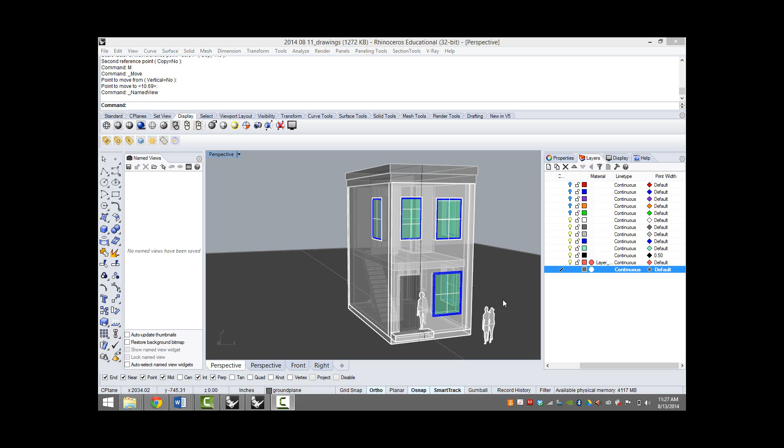Let's make a new layer and call it ground plane. We'll type in plane, or go to this menu. I prefer surface from 2 points, so we'll drag out a surface underneath our building, like so. And if it's too small, you can scale it.

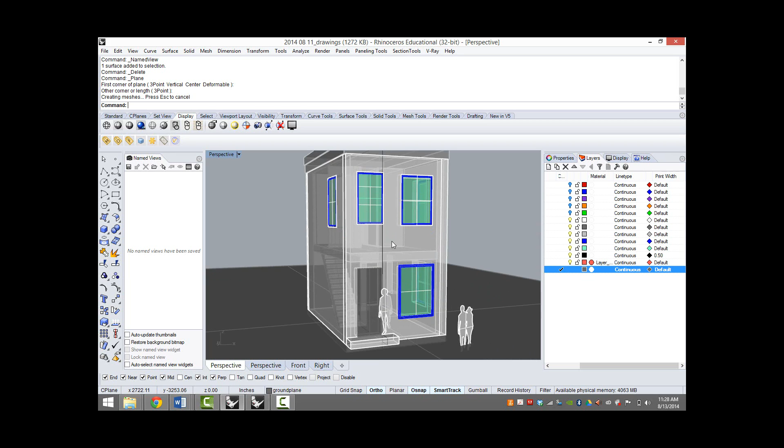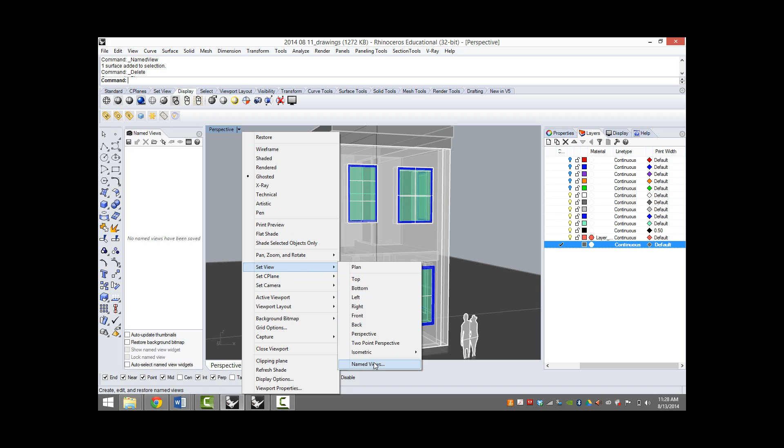Now we're going to set up our view. Does everyone know where Set View is? We go into the perspective or viewport tab, pull down to Set View, then Named Views. Once we're oriented to the view we want to save, we hit Save As, and save it as View 1. Now we have that view saved.

So if we want to maybe add another person to our scene, or modify it in different ways, we can always go back and see our View 1. Okay, looks like this person is inside the building a little bit.

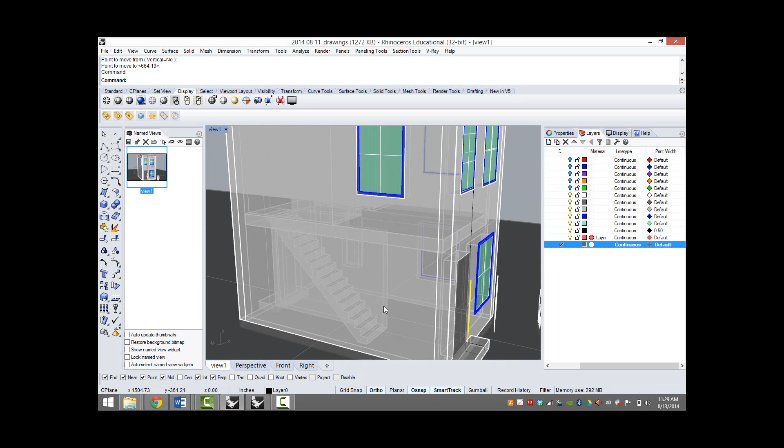Let's go back to View 1. There are several different ways we can output this now. We can render it, which we'll get to later. We can export the line work, which is a great way to speak to the drawings we were just looking at — part rendering, part drawing, working with line weights to push and pull information in and out of the drawing.

We can also talk about it in terms of its geometry and how it was created in Rhino, by extracting the wireframe and highlighting the ISO curves used to define the surfaces. In this case, with a rectilinear, more basic building, it wouldn't make sense to use that representational style because the ISO curves are simply defining planes.

So if you look here, you see not these bright lines, but this green line — the ISO curve. The plane is just a cross section like this, and those are the ISO curves that define it. But if you have a more nuanced surface that's turning and changing, that would be better expressed with the curves used to build it.

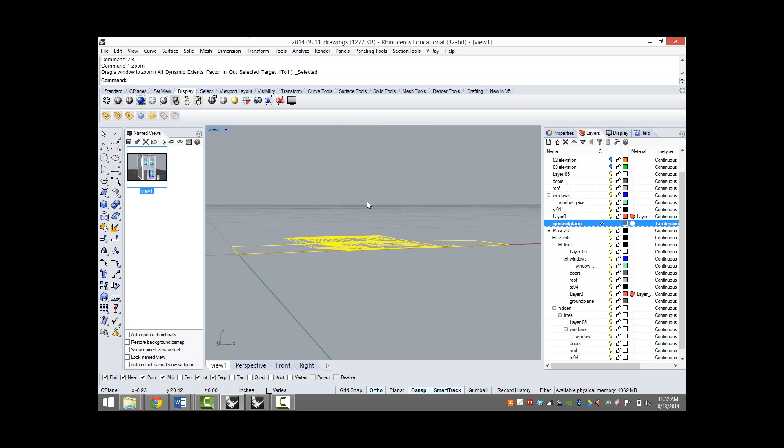Notice how in my layer menu we now have a bunch of new layers popping up, because we wanted to maintain our source layers. It will show new Make2D versions of all those layers. What does that mean? I'm going to zoom selected, ZS — Make2D. I just want to show you this.

So this is our crazy building, okay? The amazing thing is that this line work can then be overlaid on top of a rendering, or used as kind of a perspective drawing. We're getting kind of funny results here — let me see what happens if we don't choose hidden line.

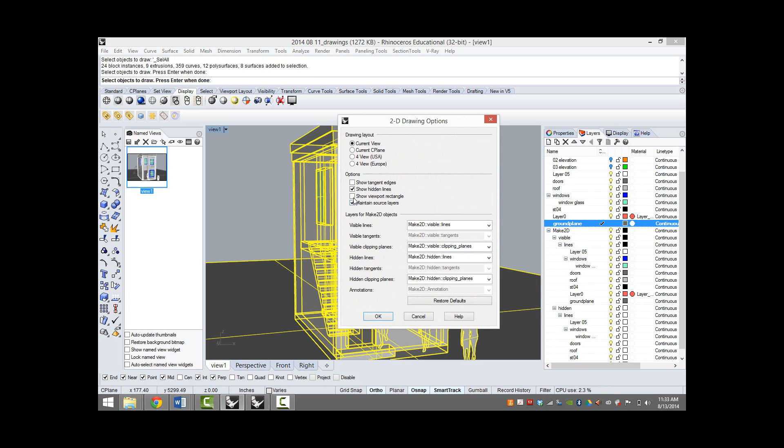Let's make 2D again. Previously, to answer your question, I chose show hidden lines and maintain source layers. Now I'm going to not show hidden lines and see what I get, because I think that was making the drawing a little confusing. So this is the difference.

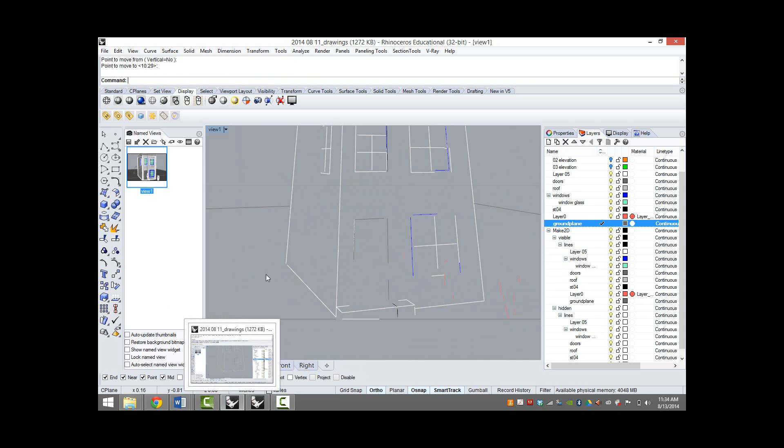So for some reason I'm getting kind of broken line work, I don't know why. Let's see — maybe I'll try just doing this. It depends on what you're selecting, and if you don't have something selected, you won't be making 2D of it in your view. Current view, okay.

Okay, that gave me a little bit cleaner geometry. I think it's the overlaps happening with the materials because it's a really quick and dirty model. But you can see the Make2D version of just the shell of the building.

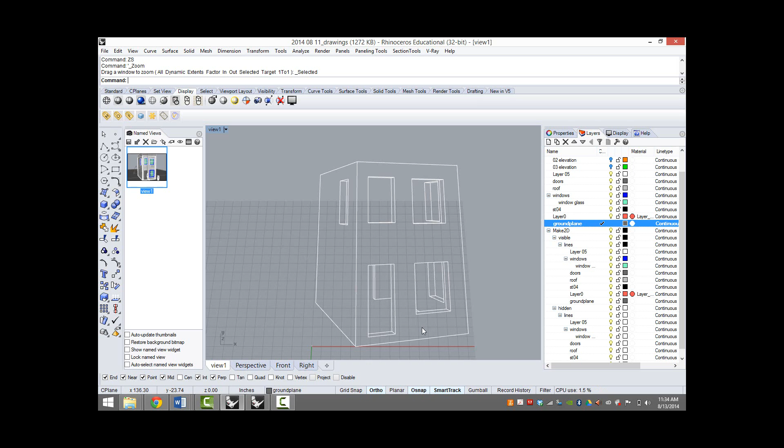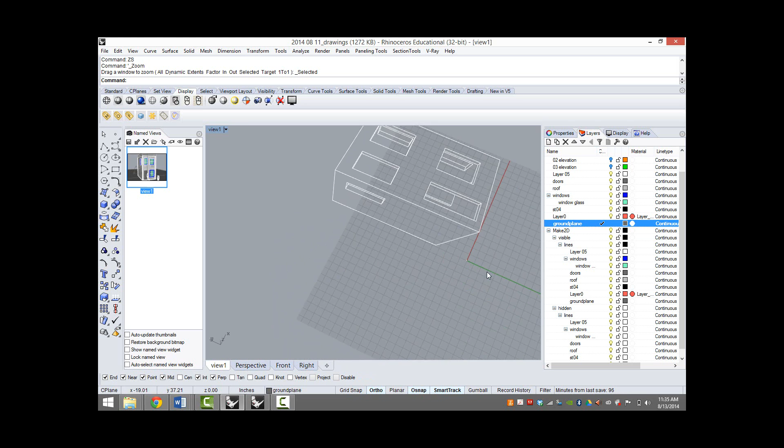So whenever you're exporting or extracting line work from your 3D model, it will end up at 0, 0, 0. So you don't want to be modeling at 0, 0, 0 — you always know where the origin is because that's the center of this grid right here.

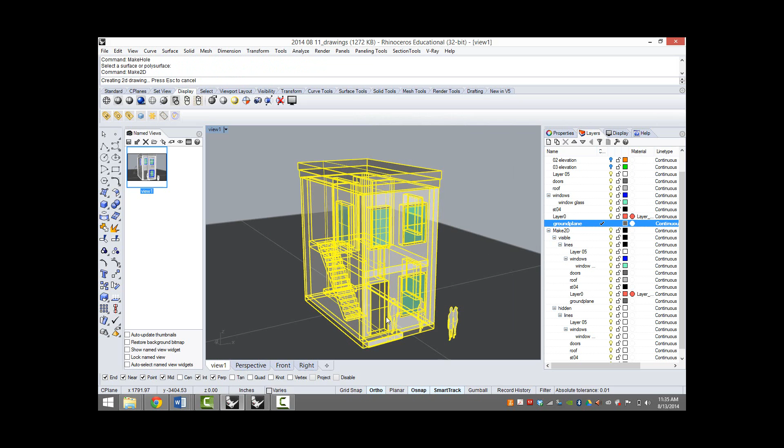The way that I do it is I type zoom selected, ZS, or you can just navigate to the origin, or 0,0,0, because it's always selected.

Oh, interesting. So I'm getting better line work when I wasn't selecting all. There must be something in the file that's confusing Rhino in the Make2D command. So select all maybe isn't the best thing to do right before you're making 2D. You should just select what it is you want to make 2D of, and you'll get better results.

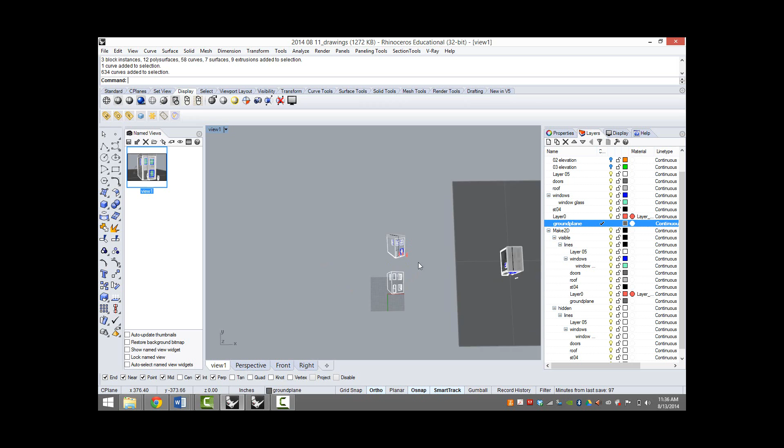So you can see I'm getting much better line work the second time around. And then all of this line work you can take - I'm going to set it to the top view, and I am going to export selected. Export. Oh, it might just be under File. Export selected, under the File menu. And I'm going to export it as an AI drawing.

And you can take a snapshot of the current view or preserve model scale. I would choose to preserve model scale. Right now the default is that it's at full scale, so 1 inch equals 1 inch. I would suggest that 1 inch equals, well, it's kind of hard - 1 inch equals 0.1 inch.

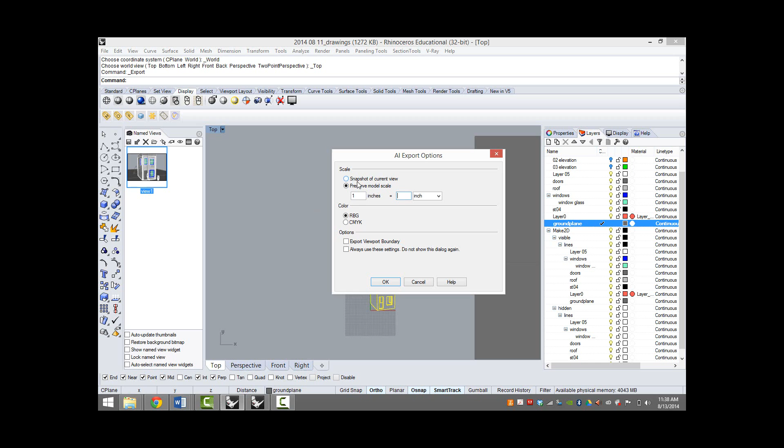0.001. Or you could take a snapshot. The other kind of quick and dirty way of scaling is just drawing a little line in your document that's a foot long, and then you can scale it in Illustrator. Not the best method, but sometimes Illustrator has trouble understanding Rhino's scale regardless. So, but yeah, good point, Elliot.

Questions so far? Do you all have Illustrator installed on your machines? Yes. Uh-huh. Okay.

Are you running Boot Camp? You're just gonna have to turn it off and turn it back on. Yeah, but no. Yeah, it will. Do you guys run Rhino on your Mac side or on the Windows side? Both. Yeah. Yeah. See how long you last.

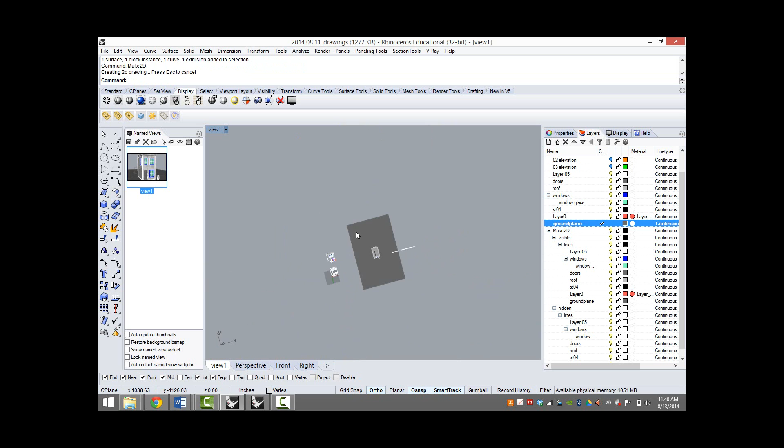Great. Okay, so I've exported these, and the amazing thing about saving these views is that it's the exact same view as, let's say, if we were going to export it now as an image file. We can type in print in this saved view.

And here pops up a dialog box with a bunch of different options for printing the file. Note that it's printing right now the ghosted view because that's what I'm in, in Rhino. So if I pull down here to X-ray view and then I press print, it's going to print the X-ray view. Okay, not awesome. I would say ghosted or shaded is best.

Ghosted view, print, and then here you have options to print to a printer, or to PDF, or an image file. You have options to alter your DPI. What's DPI? Dots per inch. So 200 is pretty good for printing. If you're just exporting it to the web, 72. We touched on this yesterday.

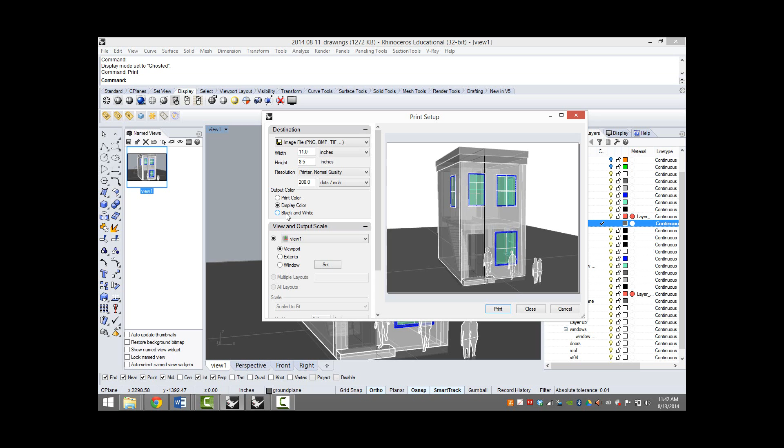So you can also choose to print color, display color. Notice how print color and display color are different, because sometimes objects aren't displaying as their layers - they aren't displaying the color that their layers are specifying. Or we can print in black and white grayscale.

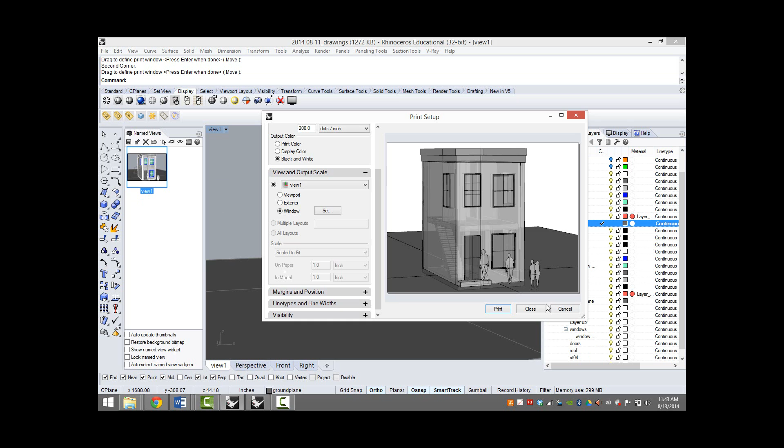And in our case, we want to print viewport, but we also could print window. Window is just kind of dragging out a window, if you want to specify a different view, but that doesn't really make sense with the work that we've done setting up view 1. So we'll redo that. Oh, and we'll choose viewport. And then you can also, if you choose window, you can set the scale.

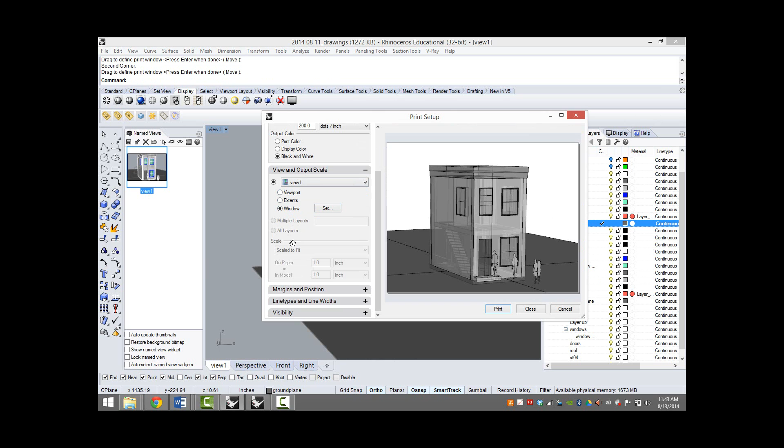So let's do that again. Enter. Extents. Wait, let's see, how do I get that? Huh. I don't know why scale is... let's see here. Close. Yeah, just for some reason.

I'm not being allowed to scale this, but that's another option typically - you can scale your drawing. And then there are a variety of other options, such as line types and line widths. But if you're not specifying your lines or you don't have much line work in your drawing, it doesn't make as much sense to export or to change those.

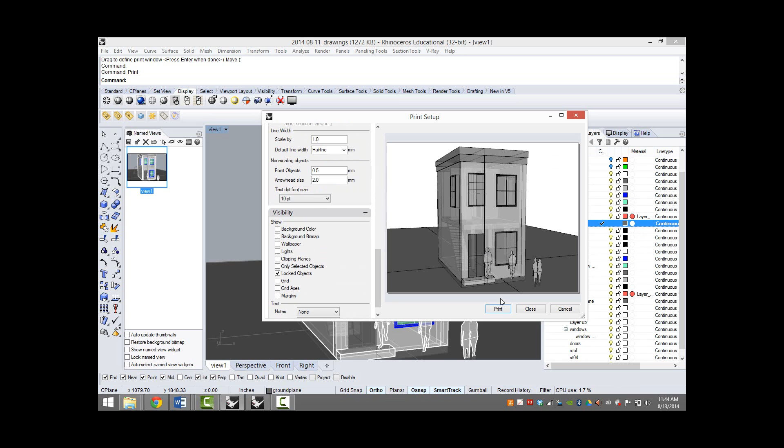So then we can print this. I'll put this on the desktop also. And it will be, because it's the saved view, it's exact - we can overlay our line work that we created with Make2D on top of this printed image.

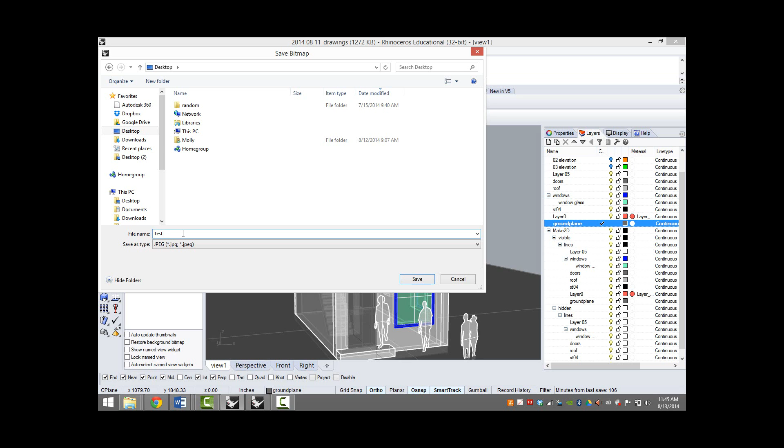Questions so far? Okay, so that's exporting in a nutshell. The other things I want to show you besides Make2D and printing, before we get to rendering, are our section tools. There are many different ways that you can section your drawing. Guess what the first way is? Sectioning your drawing.

Yes. Who said that? Awesome.

Believe it or not, you type in 'section.' Select, then go to the command line. When in doubt, read the command line: select objects for section, select your objects, enter, and then you can take sections.

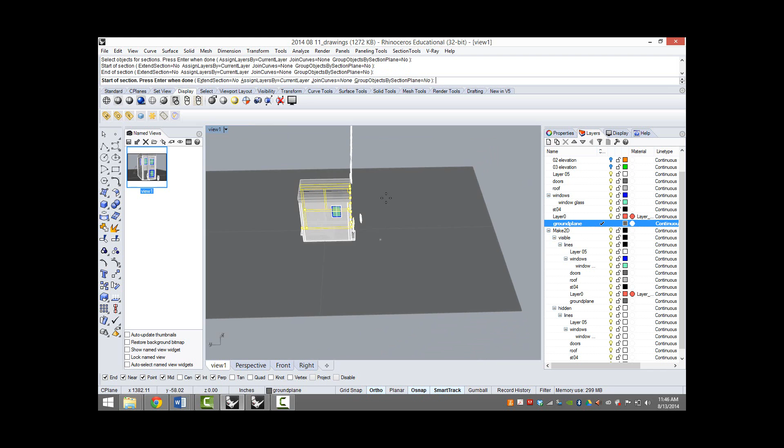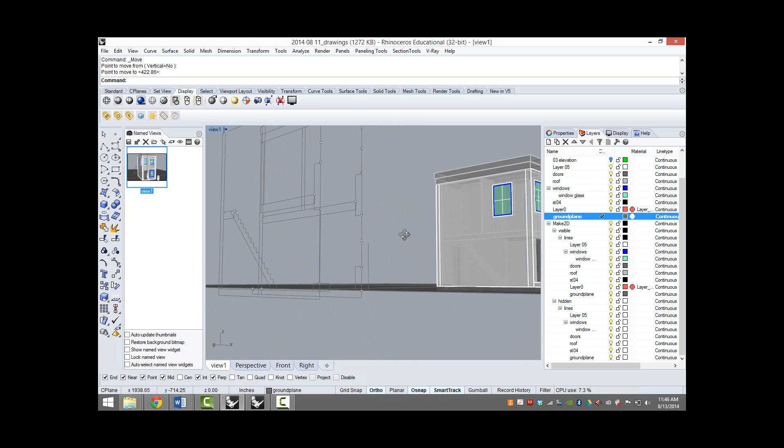Okay, there's one section. Let's take another section. Enter. And then we can move them out of the way, and we have these two sections of our building. Does everyone see that?

Elliot, do you have anything to add to this? I usually don't use section, I use section tools, but do you have anything to add? Section is part of Rhino.

Contour. Oh, okay, let's see what contour is. Select objects for contour. And then it takes them perpendicular.

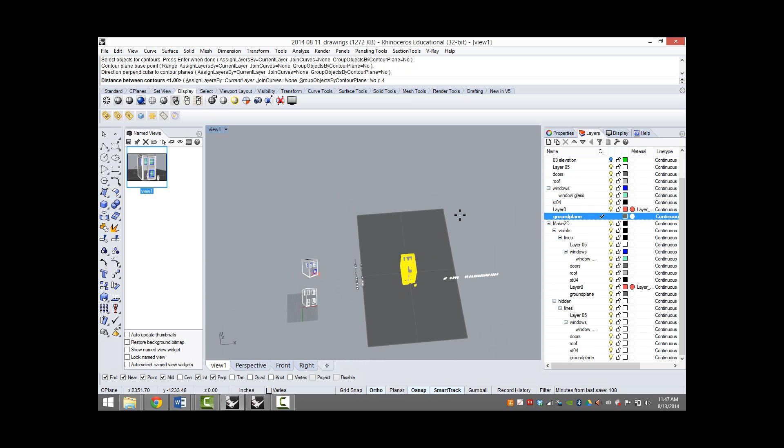So this is similar to section tools, but section tools is a little bit more automated. Contour is for serial sections.

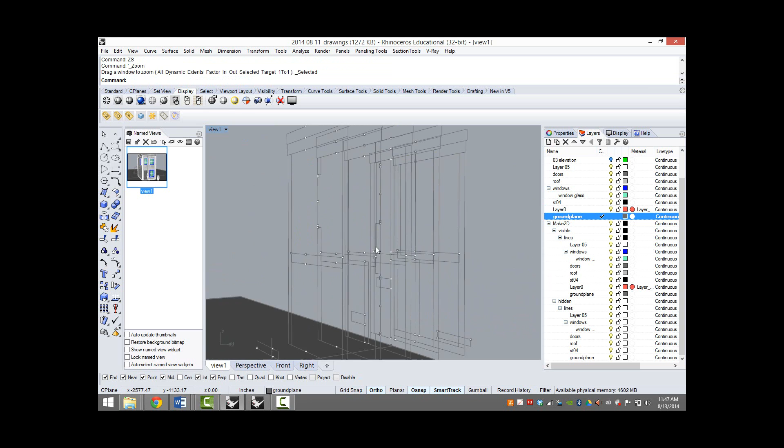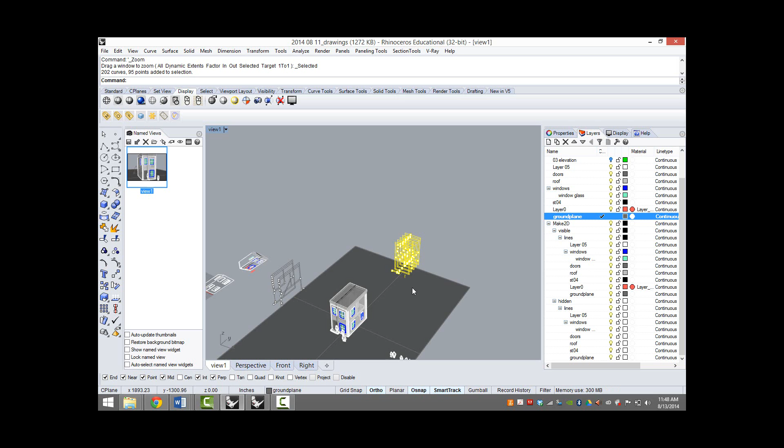We'll get into the workflow beyond just taking sections or contours and exporting it to the laser cutter next week. We're gonna get into it in just a second.

Okay, so let's demonstrate that contour. Select objects for contour. Enter. So we'll do...

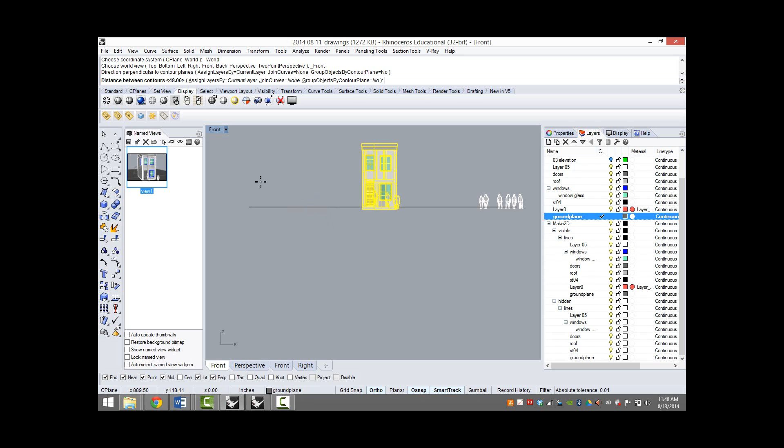Okay, so contour sections. You see there. Also very useful, maybe for making a topographic surface.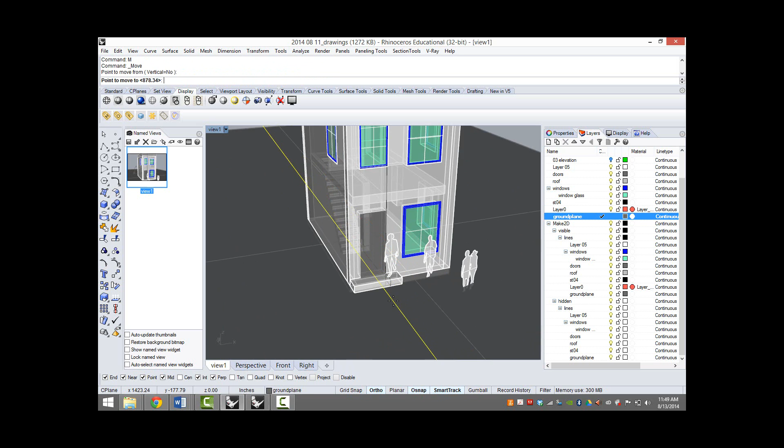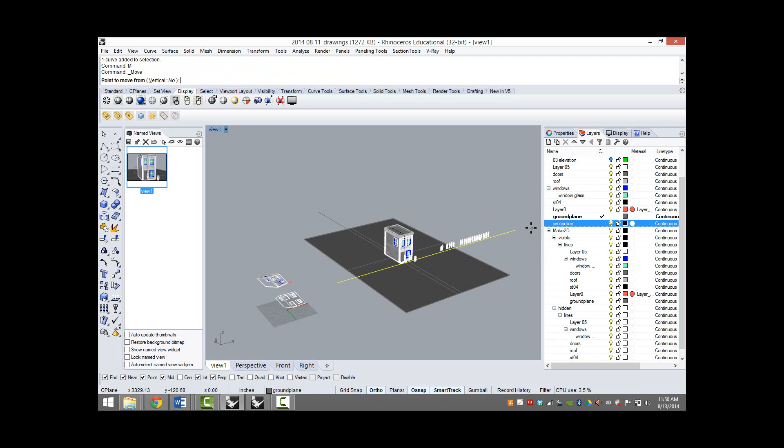Yeah, that's great. So maybe we make a new layer and name it section line. And we put our section line—can make two section lines. And we can just lock it, lock that layer and use it as a datum, a reference for all the sections we're taking.

Or maybe rather than locking it in the layer menu, I'll lock it here so that I can still snap to it. So that's a good segue.

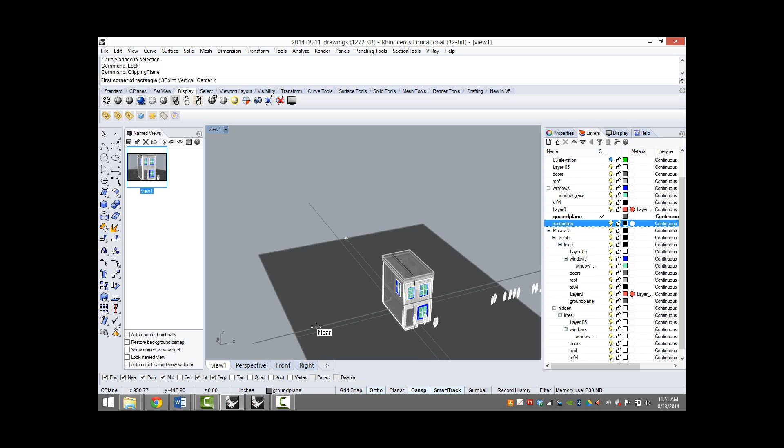Before I get into section tools, let's look at the clipping plane. Clipping plane is how you would make section perspectives. So I'm gonna take a section perspective that will work with the view that I've made.

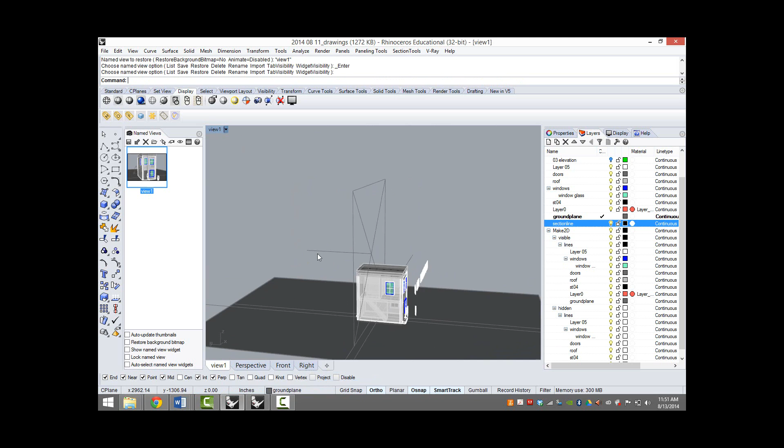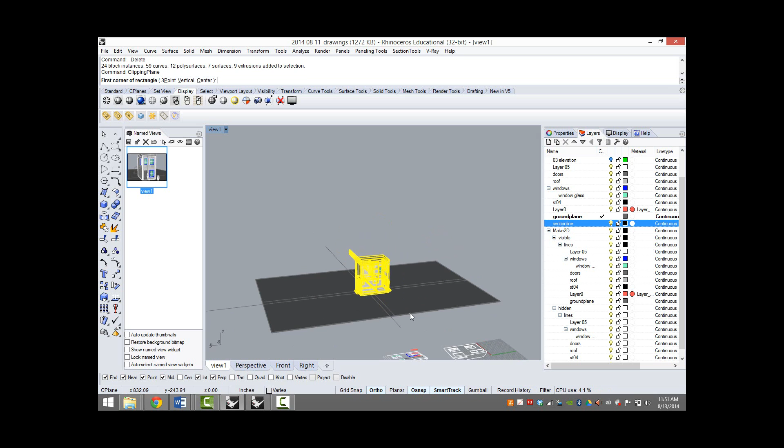Okay, there we go. Go back to my view. Let's try this again. Clipping plane, vertical. There we go. So you need to select the item you're clipping before you create your clipping plane.

And you can see as I move this clipping plane, it's clipping the building and the ground plane. Then we can look inside our building and see the cutaway section. And with that information, same on the back side here.

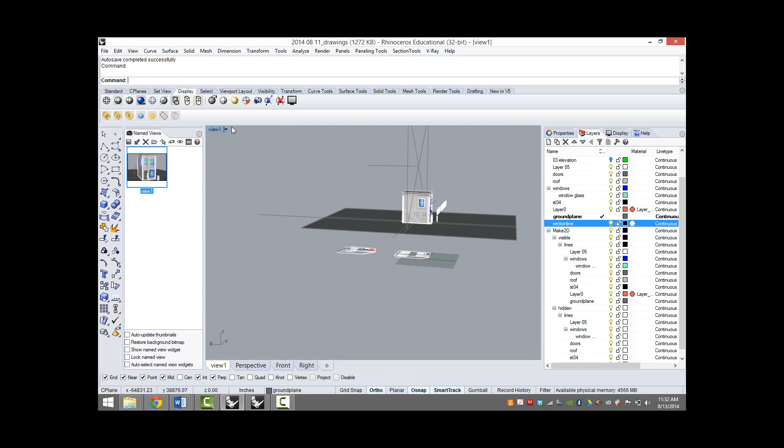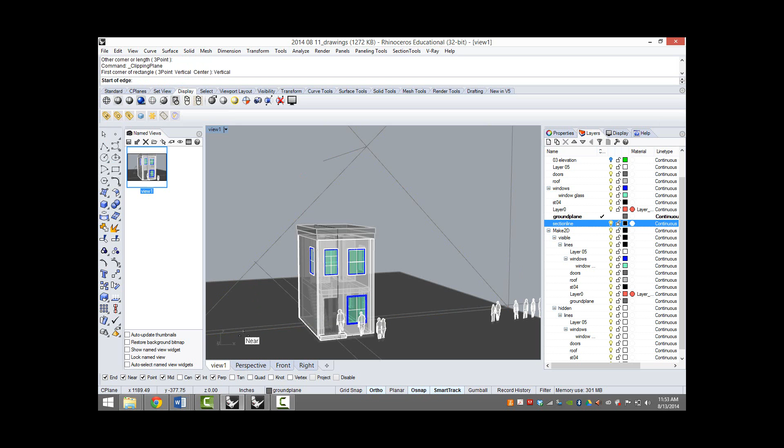Or is it only happening in the view that I made it in? Let's see. Okay, yeah, here we go. Vertically. There we go.

So in view 1, you can pull down within the view and choose clipping plane. So if I go to view 1, clipping plane. Let's see—I've never done a non-vertical clipping plane.

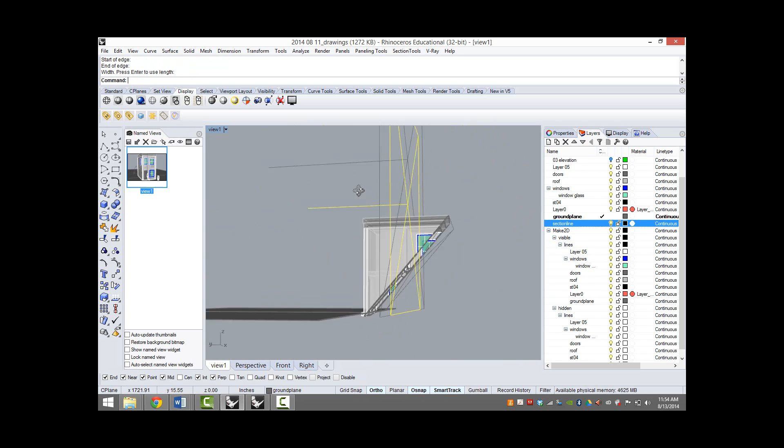What was that? Yeah, there we go. Clipping plane is a great tool.

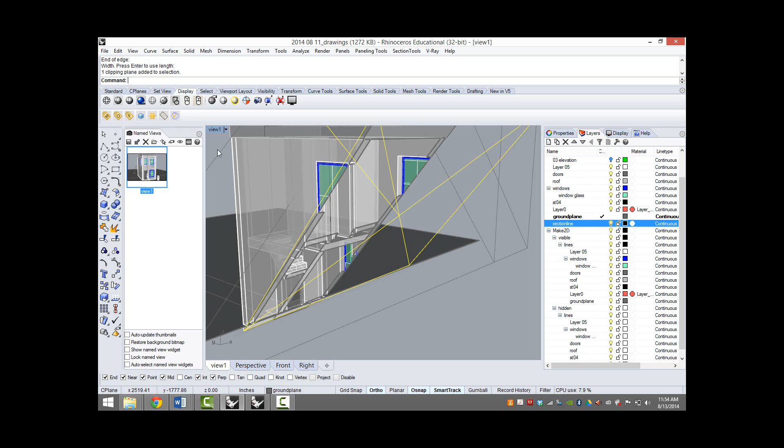Yeah, so I can do a test render right now. Or not—I've rendered it in the past. It's strange. Let's see if it shows up outside of V-Ray. Okay, so for some reason it's not showing up in V-Ray, but it is showing up in Rhino Render.

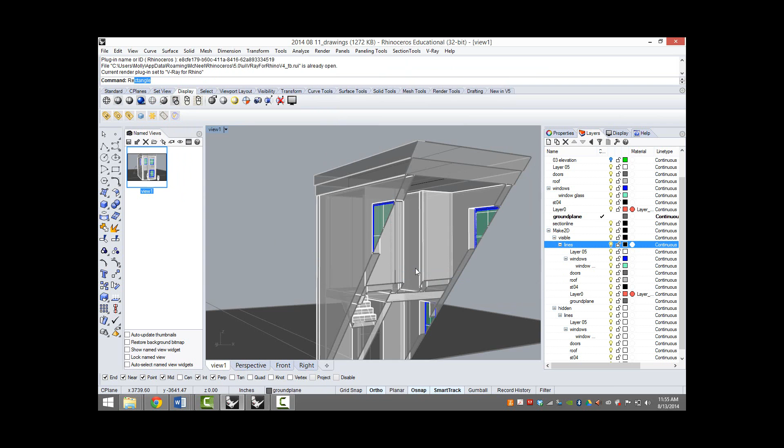So we'll take a look at that and try to figure it out for the next, maybe for the rendering tutorial. Yeah, it's not showing up. Okay, so those are clipping planes. Questions about that? A little finicky in the end.

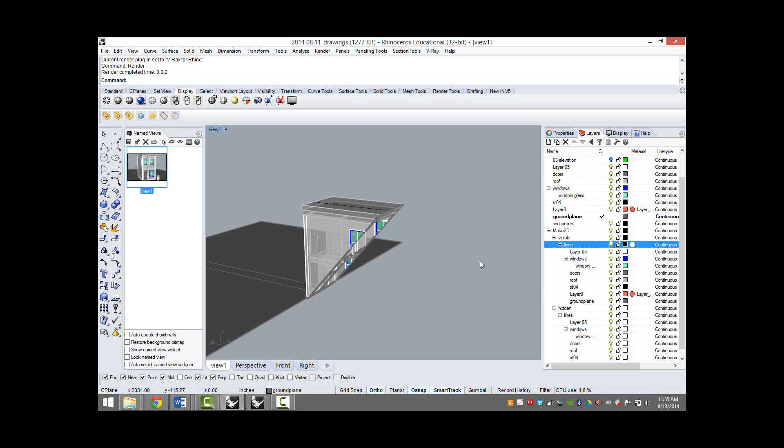Yes. Yeah. So do you want me to just review how to make it? Review how to make the clipping plane? A section view? But it's not doing anything? Okay, yeah, let's try it again.

Okay, so clipping plane, let's choose vertical. So we're just making our clipping plane like so. And it's clipping away—note that it's clipping away.

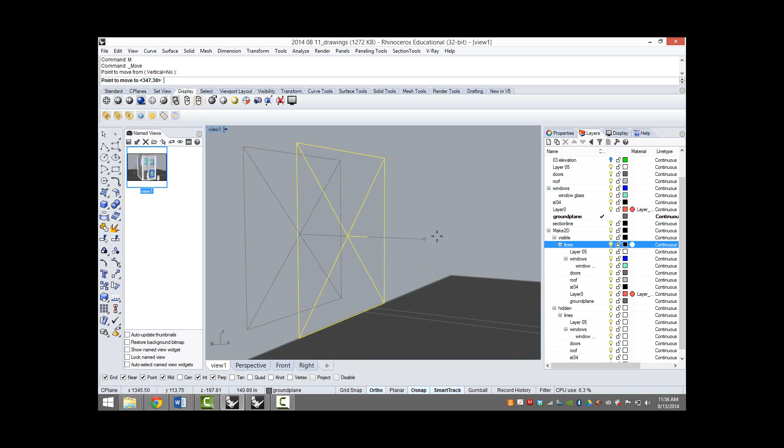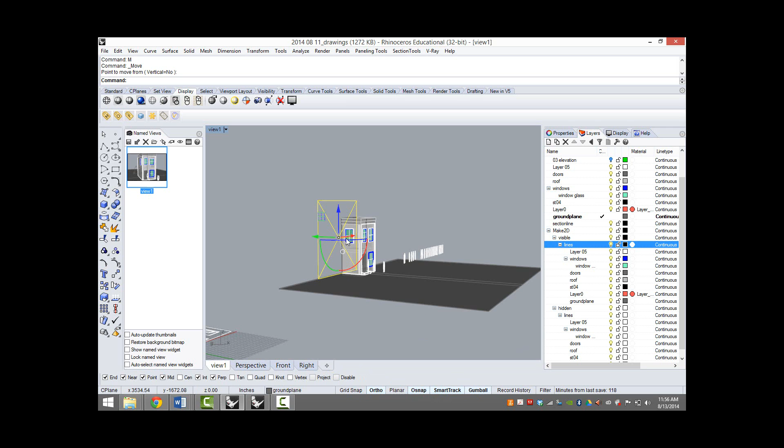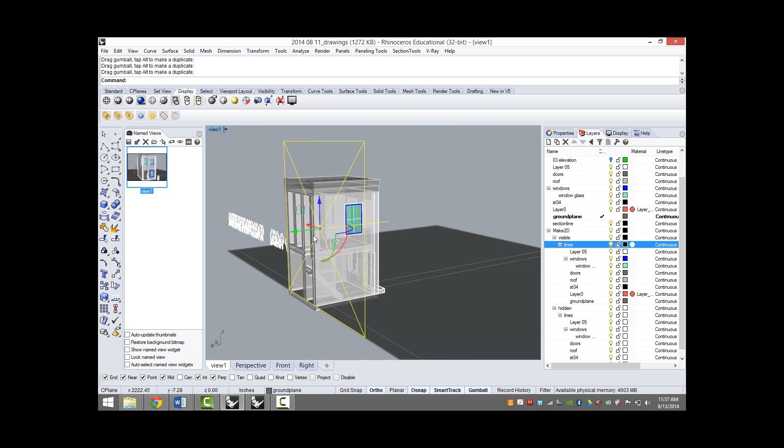Oh, okay. How do you turn it on? Oh, great, okay. Yes, great, Gumball is great. Okay, so you can see here—so it's just, were you having trouble drawing the plane, or it just wasn't clipping? Is it working now? Great.

Okay, other questions? Okay, so we've done clipping plane, section, contour, make 2D, print. Now let's look at section tools.

Section tools is a pretty powerful tool. You can create single sections. Notice how Section Tools is a plugin that just pops right up in your toolbar, which is pretty awesome. Paneling Tools is another great, more developed plugin that pops right up in your toolbar.

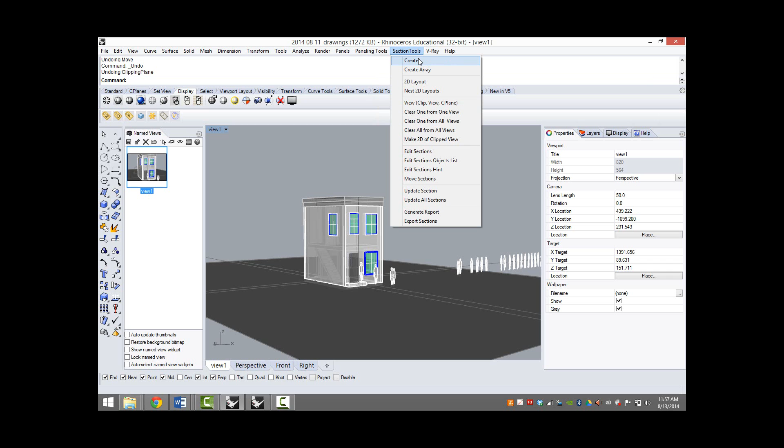But to create a section similar to creating a section in Rhino or with Contour, you select the object to section, enter, and then you can choose the axis to create the section on—the y-axis, which will be in this direction, or the x-axis. Unfortunately, you can't move in the z direction, it's only x or y.

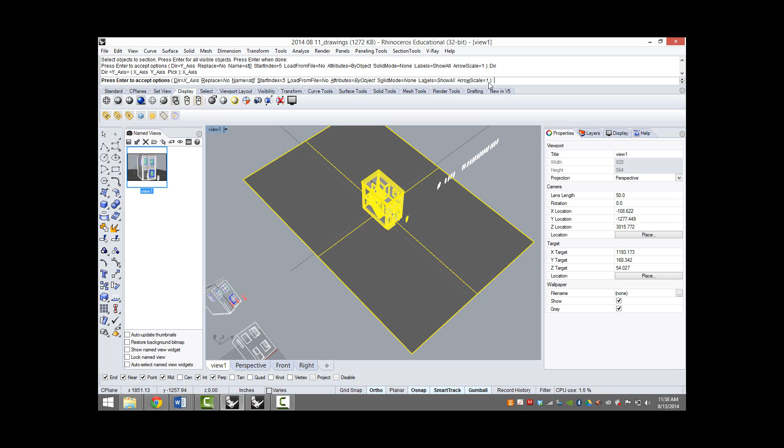And you can choose how it is you're going to name your sections, how many sections you're going to take, the scale of the arrows, because there's a little leader that kind of defines the section.

So once we have our object selected that we want a section, we'll press enter, and then we are just going to choose where it is that we take the section. We can place one section, we can place multiple sections.

Press enter, and then our sections are going to show up in our layer menu, similar to Make 2D. And then these sections we can take from our layer menu, and we can lay them out in 2D.

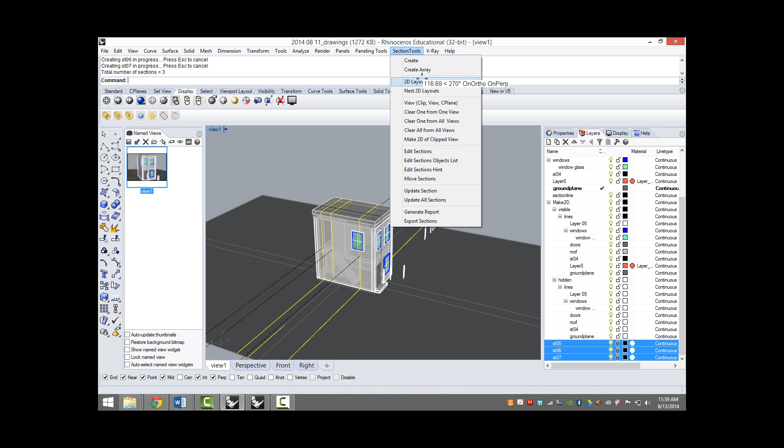We can either lay them out manually with 2D layout. Select sections, select them here, enter. Section, section, section.

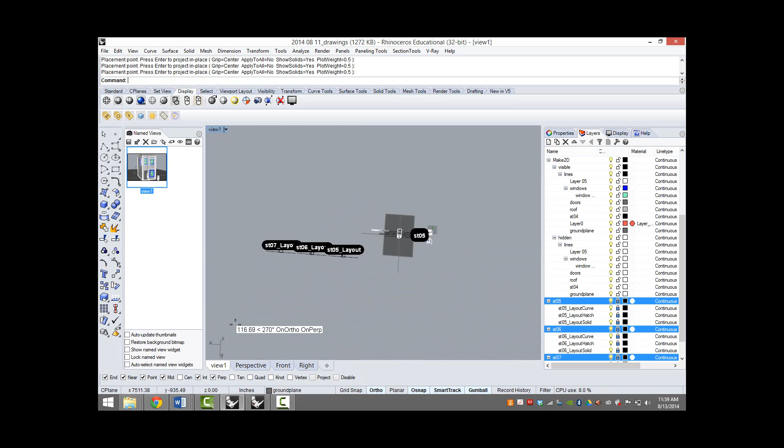Check those out. There are beautiful building sections.

The other way that we can lay out our sections, we can take serial sections similar to Contour. So that would be Create Array. So if we go back into Section Tools and we choose, rather than Create Array,

we can select that from the menu and then select the objects that we want to section, enter, and then similar to Contour, we can choose the distance, the number of sections, or the spacing between them.

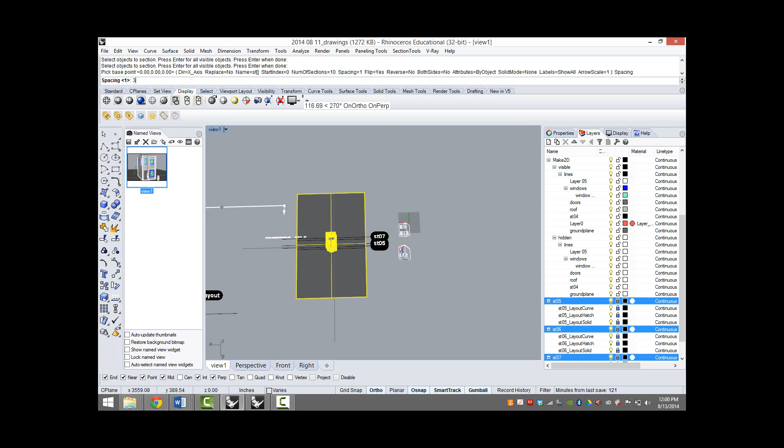So for the spacing between them, I'm going to choose 3 feet. Number of sections, I'll choose 9. That seems good.

And then you can take your sections. There are a number of other options that you can select, both sides, for instance. You can take sections from both sides. Labels, you can show them or not show them. I like to have them. I think it's nice for labeling later for fabrication purposes.

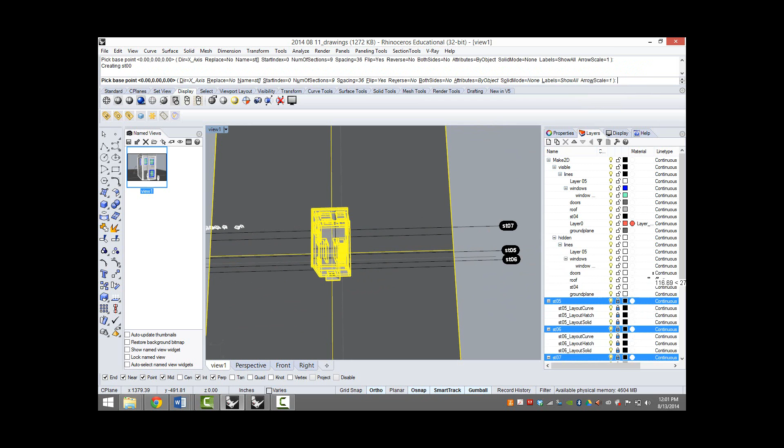So now, amazingly, they all show up in your layer menu. They're all selected right now, so you can just go straight into 2D layout is what we did earlier. Now we're going to try Nest 2D Layout.

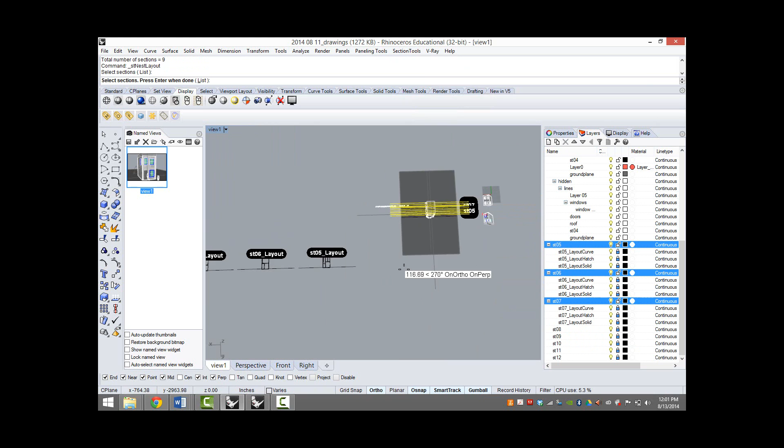Enter. Pick a base point. So that just laid the sections out in a way that they're as close to one another as possible without overlapping. And because we have this ground plane in there, they're actually quite far from one another, but if they were just the building, it would be in a nested pattern that would allow you to lay out a material and cut really efficiently on the laser cutter or CNC router.

So it's a really great fabrication capability with SectionTools. Any questions about that? That was a lot of information.

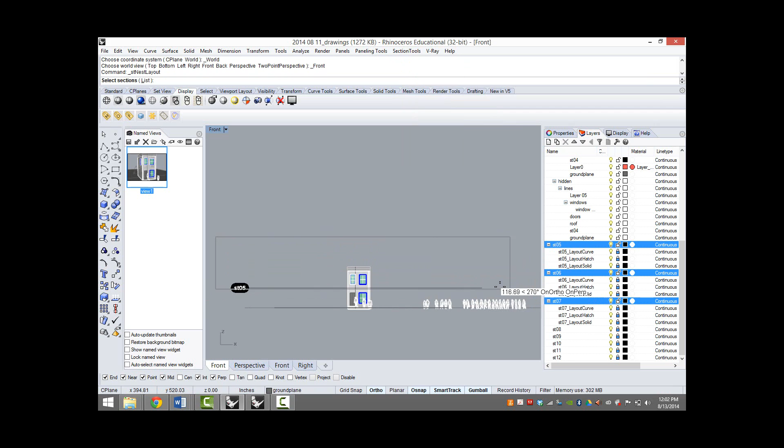Vertical nesting, that's a good question. Let me see. Let's try that again. Section tools, nest 2D layouts, select sections, enter. Oh, it doesn't look like it. Oh, arrange vertical. Oh, I think that's vertical meaning Y, but let's see.

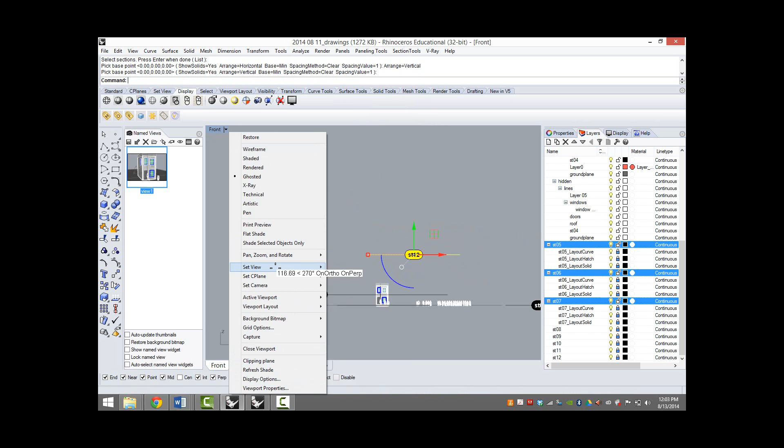And then you can choose your spacing value. So right now it's 1 inch. Yeah, looks like it's just in the Y direction. But notice how they're much closer together. They're actually only 1 inch apart here.

So that helps. That really speeds up the process for fabrication and layout. Rather than having to take your section, rotate it 3D, place it, it's all just laid out flat for you and labeled. Let's see if there's anything.

Let's check it out. So section tools. Oh, create. Solid mode. Hatch, let's try.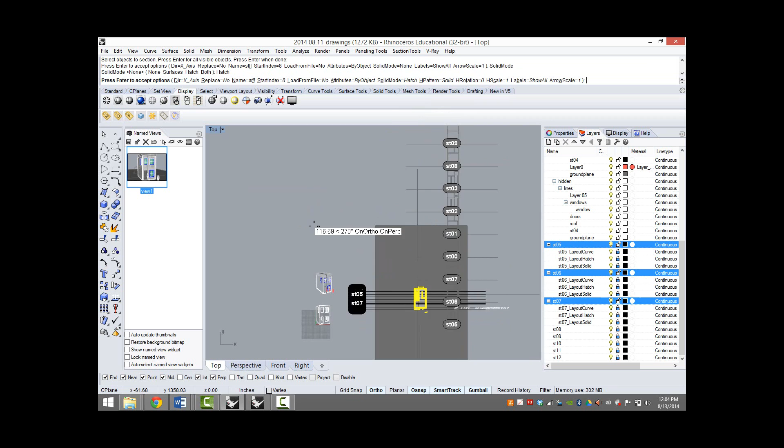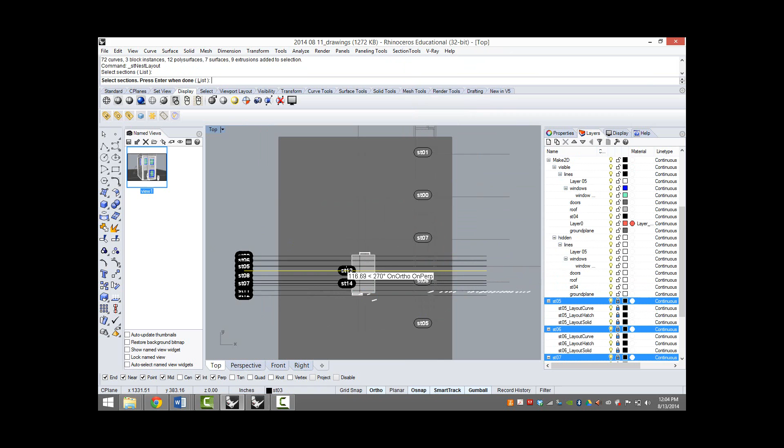We'll put section there. And then let's take those. So that creates a hatch for all of the areas that you're cutting through, which is also a really nice feature.

Section tools. Get into it. Yeah, I have used Smash. Smash, Unroll, Set Point is a great one too. Should we try Smash?

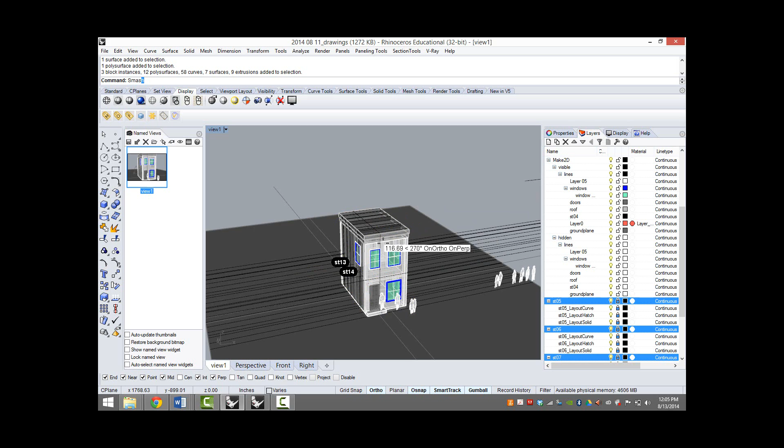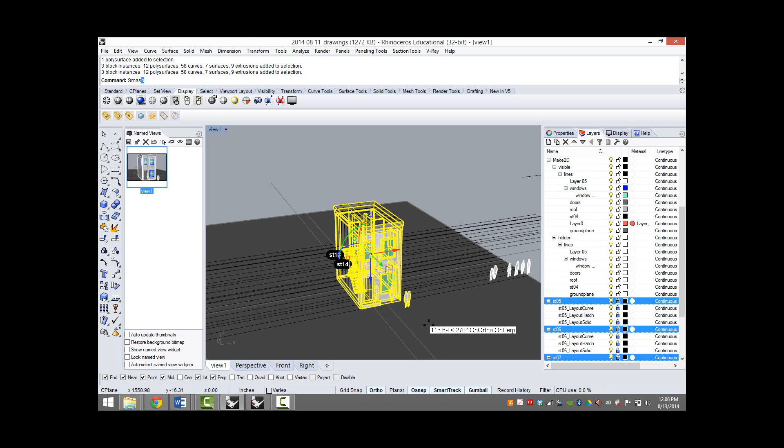Let's see. Go back to view 1. I haven't actually used it in some time. Smash. And that's the same with Unroll, which I think might be a little bit more precise than Smash, but I could be wrong.

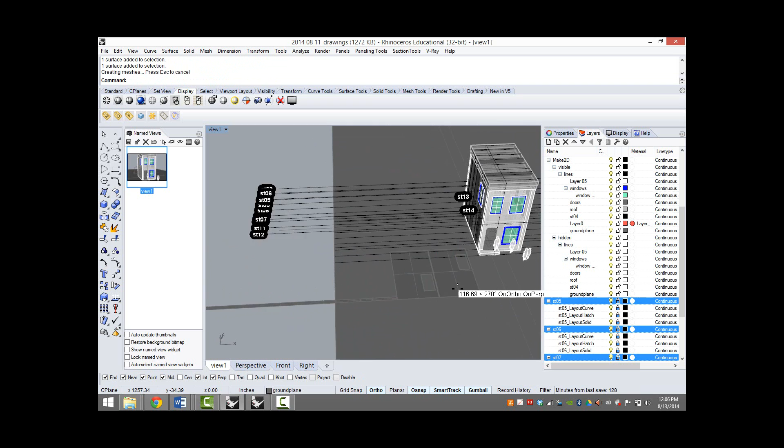Yeah, so you can see that Smash just pieced out all of the different surfaces that created that floor plate. Let's try unrolling, see what that does.

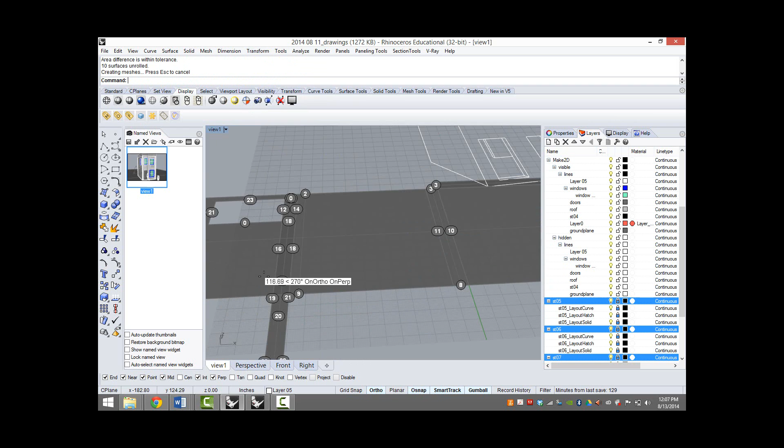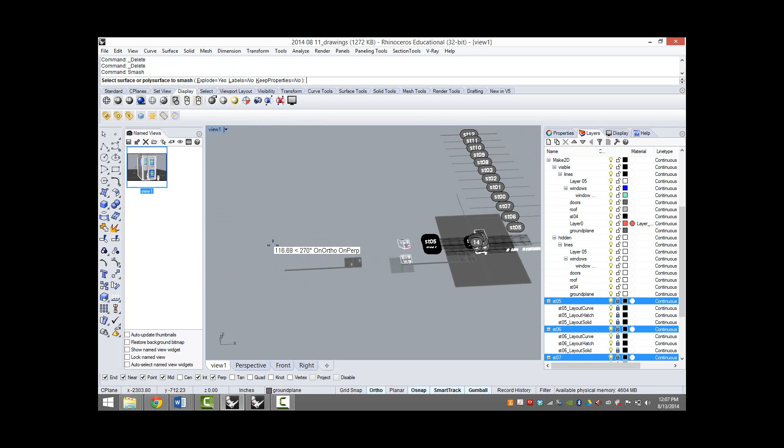So unroll, similar in this instance. Then unroll for Smash. Yeah, it looks like, yeah. I wonder, I always understood Smash as changing the geometry somehow, but maybe it doesn't. Yeah, because it looks very similar to Unroll.

Yeah, but there's so many different workflows and plugins and third-party software that you can use to achieve these different results. So be agnostic. I mean, go for it. I mean, learn everything, and it will serve you.

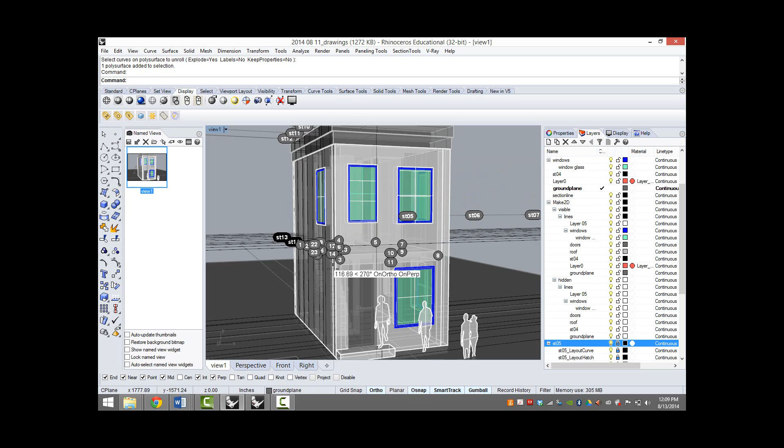We'll continue in the afternoon with Sam's tutorial on Illustrator. So he's going to take line work from Rhino and treat it in Illustrator so it becomes more of a presentation document.